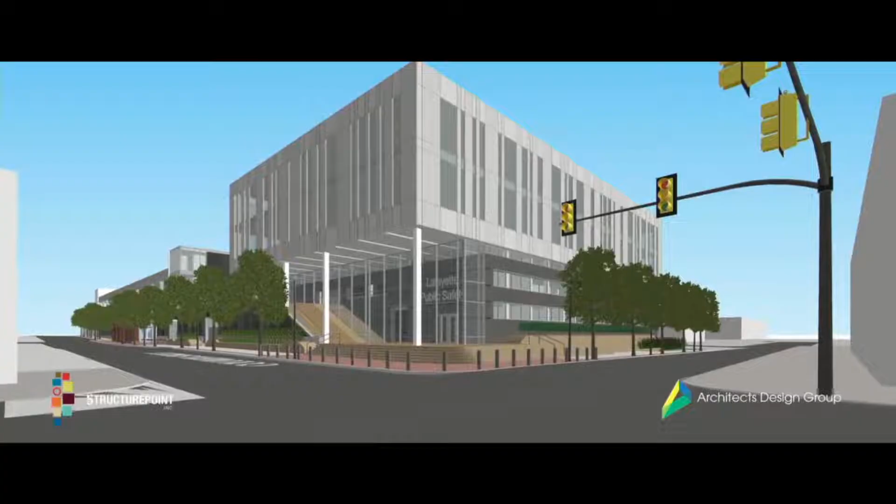The Lafayette Public Safety Building, it's more than just a police station. What we're really hoping for is that we can create a nice centerpiece for the downtown area. And we also want a facility that's welcoming, a facility that says to the community, come on in. Well, it'll be a multi-story building up to 70,000 square feet. The building is being designed with a lot of glass that let a lot of natural light in. We want this building to also be one where people walk by and go, oh wow.

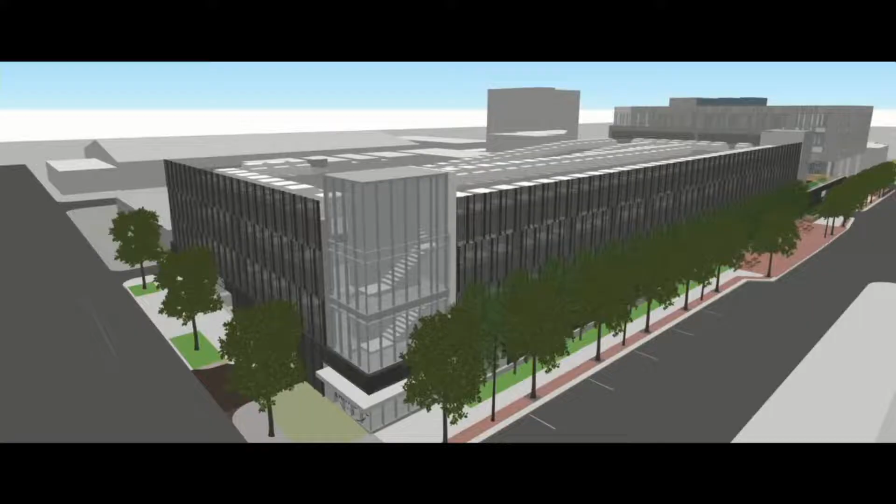The new public safety facility is going to be built where our existing parking lot stands today, on the corner of Columbia and 6th Street. We're also building a new downtown parking facility. Part of that will obviously be used by the police department. It'll be about a 500 space facility.

We can help the police department with their parking needs. We can help our downtown merchants. We can help all of our citizens that come down to participate in all of our downtown activities. We're hoping to break ground at the end of March 2021, and the construction will be all of 2021 and for the most part all of 2022.

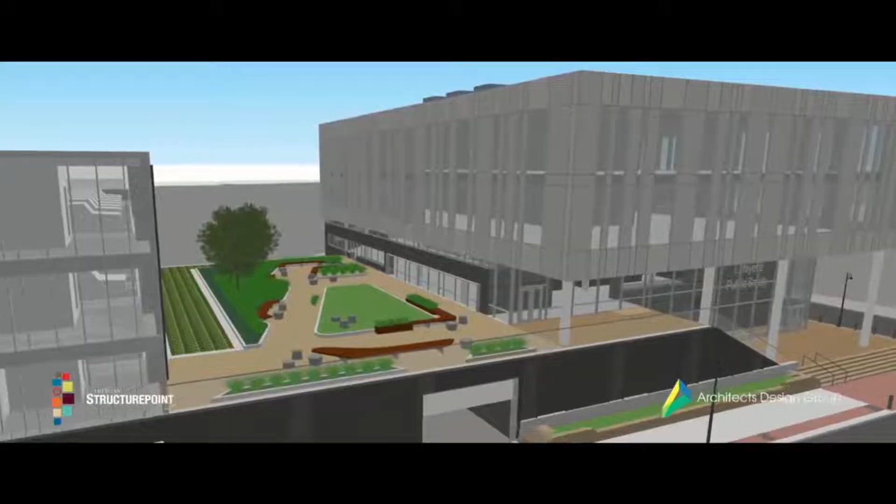We're looking in that somewhere probably in that $45 million range between the entire project. Currently, we're looking for as much feedback as we can get to ensure that we don't miss anything in this process. The public will get to look at some of the first drafts, and we also want their input.

We're excited about that synergy that it's going to create and our ability to provide the very best services to our community in the short term and moving well into the future. Having a department that can recruit the highest and best officers, those officers come to a great work environment every day and have the tools and resources that they need to effectively do their job and to safely do their jobs. We all win. We win from seniors to kids, from businesses to individuals. We all win when we have a safe community and we have the resources needed to keep it that way.

So the next slide we're going to show is a little bit of an animation that talks about some of the growth that we've experienced, not just in Lafayette, but in Tippecanoe County. And while expansion is a great thing, it provides the opportunity to keep Lafayette moving forward. As a police chief and as a police officer, we see this expansion in a couple of different ways. And the one that we're really concerned about tonight is the demand that places on the services for public safety and our resources.

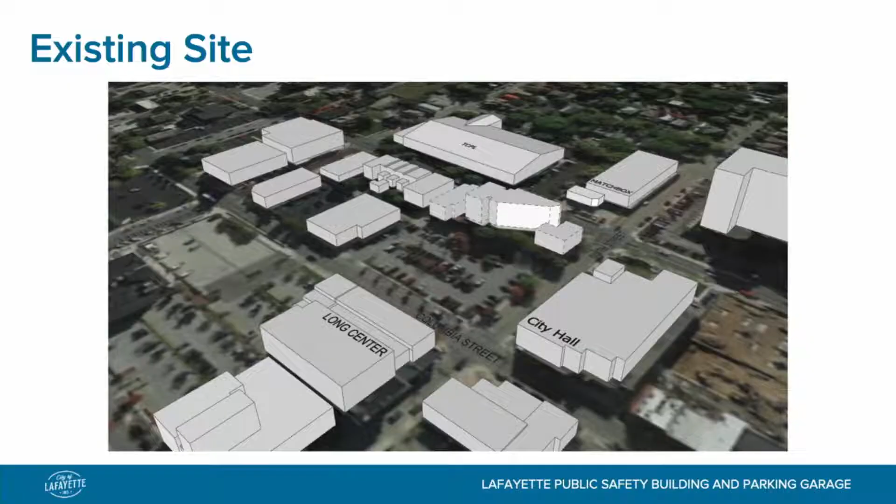Our design process focuses on numerous things from a site selection standpoint and site analytics. Top left of your screen, you'll see the properties analysis. At the corner of 6th and Columbia is the majority of the public safety component of the facility, and stretching through to 7th Street is the parking garage component. There were many iterations and design studies on how to use such a compact urban site—do we go down, do we go more vertical, do we focus the parking garage closer to the corner, or is it better stretched out along Columbia?

On the upper right, you'll see a connection to the green space. Of course, this is a very urban site, and we want to bring as much green space and softness to this project as possible. We'll be speaking about a component of the project that enhances that green space within the juxtaposition of the buildings, creating another civic space, not unlike what's on the south side of City Hall and closer down to Matchbox to the south of the site.

Lower left of the graphic, you'll see a traffic study. Columbia is a one-way street heading westbound, while 6th and 7th are north-south streets with two-way traffic. So, as the chief was talking about earlier regarding how to react to events and calls, we want to make sure this building has vehicular access, giving officers the best chance to get on the streets as fast as possible when coming from the central headquarters. Most officers are out on the streets, so dispatch is going to be a key component to this facility as well.

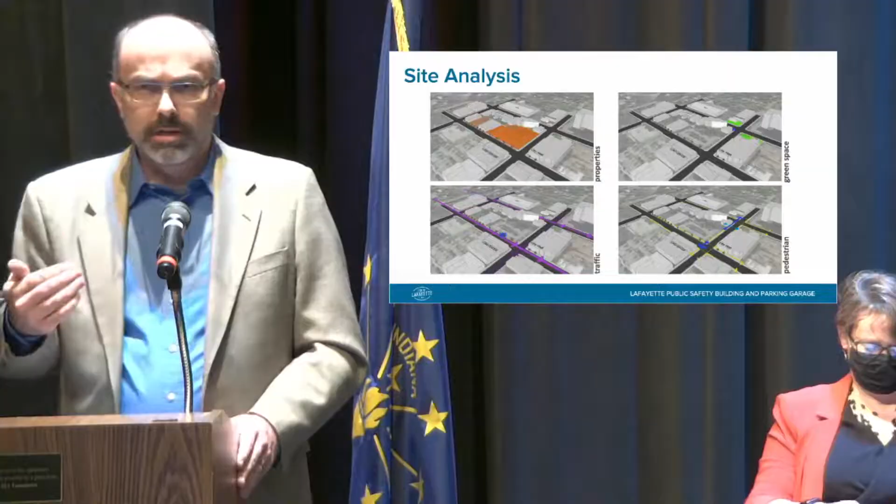Along Columbia Street, heading westbound, we want to make sure—and you'll see in the visuals—what the character of that building looks like. How does it reinforce the fabric of downtown? Does it draw materiality from other aspects of downtown—bricks, metal panels, glass? As the mayor mentioned, there's a strong desire to have natural light into these spaces, so we've brought that into key components of the entryway and the office space within the facility.

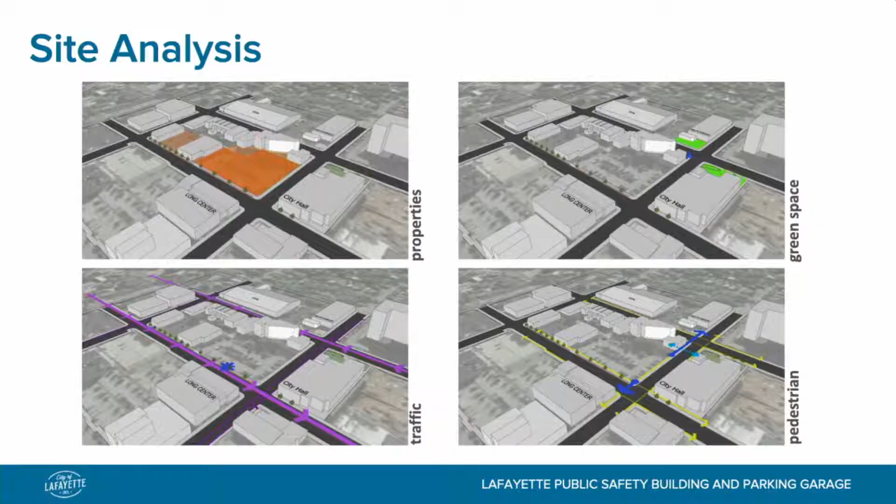On the lower right, which may be the most critical aspect of a downtown facility, is the pedestrian traffic. We want to create a space that is inviting and connects the different aspects of downtown—the hotel, the Matchbox, the Long Center. After events, this facility can act as a public gathering space. In the summer months, you'll be able to relax on a plaza and maybe even watch a movie on the side of the building, which could be a great community asset. This is a community building, not just a police station. It's public safety designed to entice interaction, as the mayor was alluding to as well.

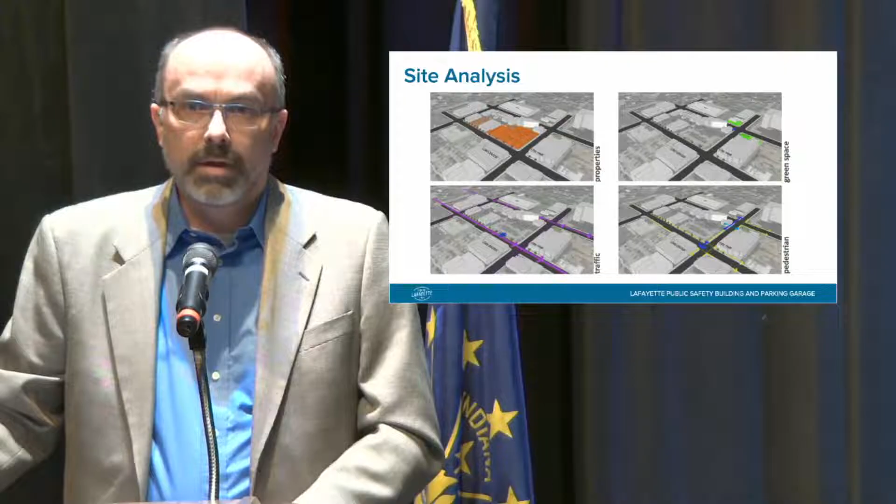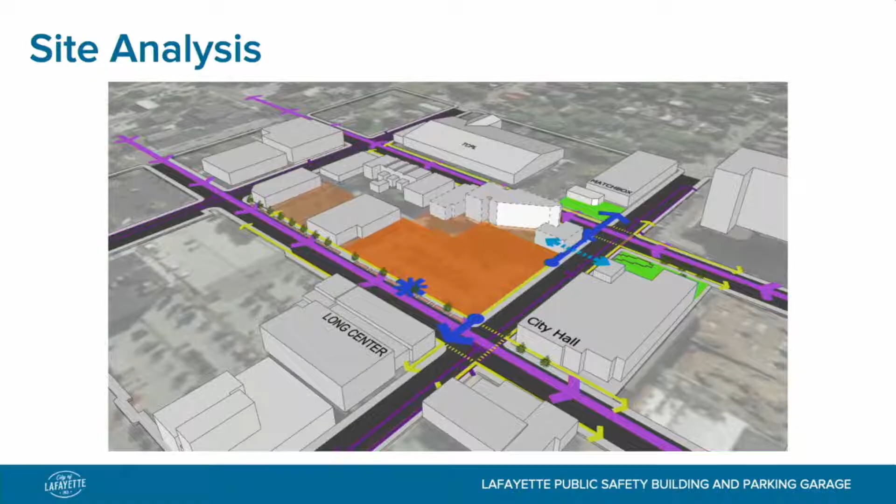So when you bring all these things together, you've layered on the green space, you've layered on traffic, you've layered on pedestrian, you've tried to figure out how to use the property available. Again, it's a very dense site, so we try to arrange things in a manner that's budget conscious, but also fits the program needs of that facility. The chief alluded to, we want to make this an efficient building so they can do their job most effectively to serve you.

Up onto the second floor, you can access that second floor entrance via an exterior stairwell that we'll look at in a little bit, or interior to the building, there will be a grand stairwell or an elevator for certainly accessible means to the second floor. So on that second floor is going to be a great community room aspect to the project. That is going to be able to host events the police require. It's going to be accessible to any community. The city will be managing the access to that room, but it's going to be a great opportunity to bring other types of events to this building, but not detract from the security that the rest of the facility demands.

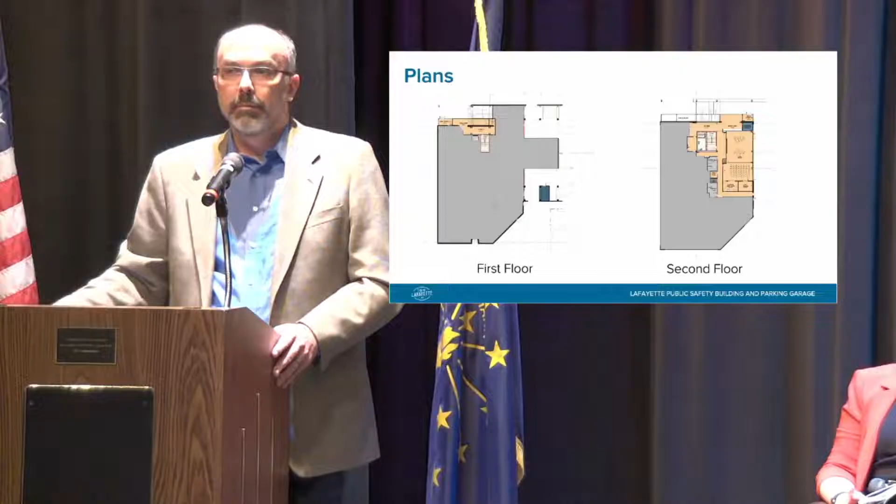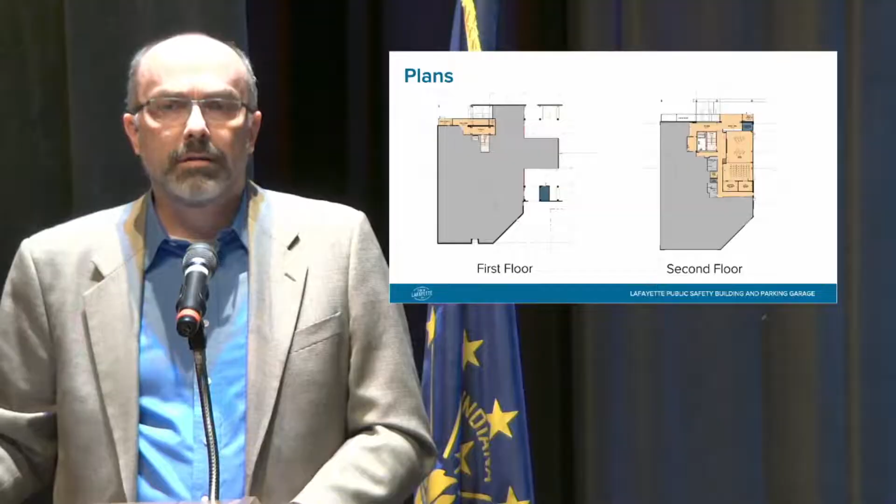So it is separate, but also to the right of that plan, which we'll talk about in a little bit, a civic space on top of a secure garage. So the police have the first floor of the garage, which will be secure for them, and then the public aspects of the garage will continue on the second floor, accessed from 7th Street on the east through metered gates. Daytime parking and nighttime and weekends will vary based on the way the city would like to manage that. There will be a small catering component to that meeting room, divisible partition to kind of separate it if smaller events and groups are required.

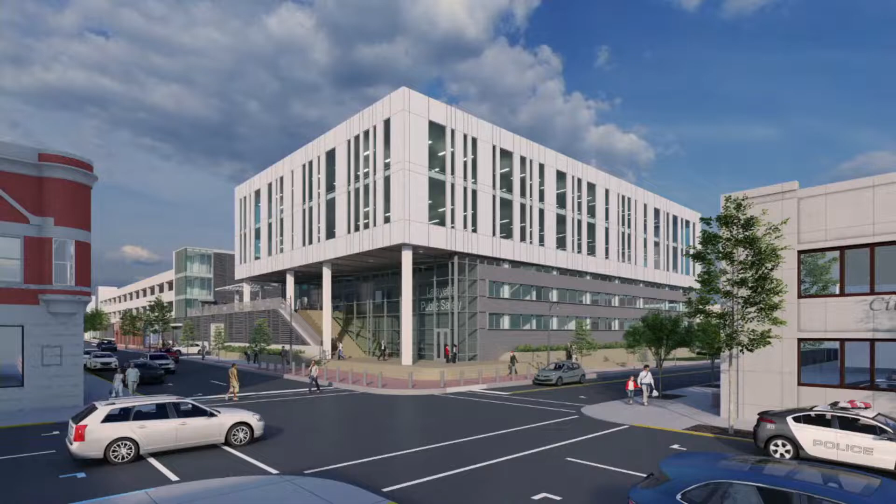So this is a 4-story building. We only showed the first and second floors, the more community aspect of the building. The upper floors have further police department program on those floors.

But again, as we talked a little earlier, we want to make sure this building is contextually connected. Across on the right side of the screen, you can see current City Hall. On the left, you can see the building on the corner, historic building on the corner of 6th and Columbia, just south of the Long Center that we're at right now. So we want to bring in masonry as a historic element on that base, a strong base to lift up conceptually the police and all the services within that building.

So on the upper floors, the 3rd and 4th will be clad in some sort of metal panel, kind of light metal panel, silverish, that might have some different tones to it to add some character along the facade, with varying widths and dimensions of glazing to let as much natural light as we can into the facility, but also maintaining as much energy efficiency as we can. We certainly want to make sure with the energy code demands on the building, but just being good stewards of city tax dollars to maintain this facility. We want to make sure that that's responsive.

Next slide, please. This is a view heading westbound on Columbia, nearing the end of the parking garage, so you'll see the entrance to the parking garage. This will be accessible from the public, with accessible elevators to all levels of the parking garage, but also takes you to an accessible entrance to that civic plaza on top of the parking garage.

Secure entrance to the police parking on this side, and then we're trying to create an element along Columbia that breaks it up, adds some texture and visual color to that base. Again, creating a strong base, and then bringing the element of the police station out to Columbia so it has a strong presence, and the building itself is its own landmark on this corner of the city.

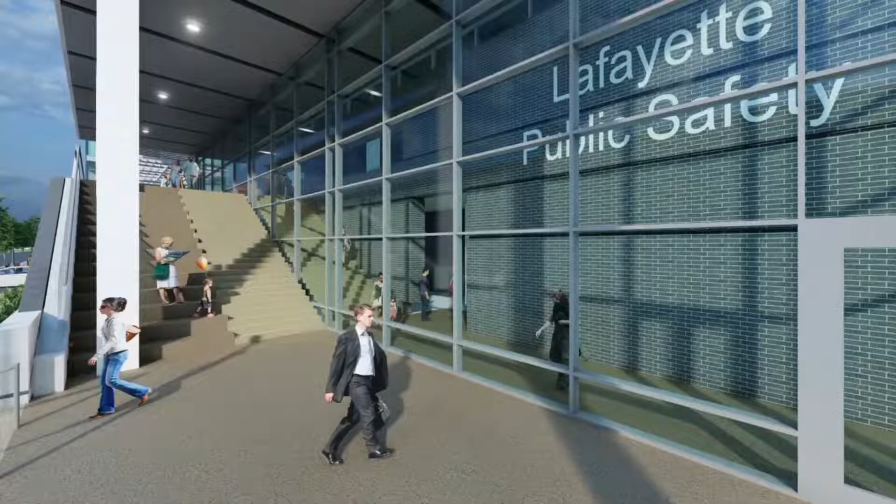Next slide, please. So this is standing on that main entry plaza, heading into the building. Inside, we're going to have a mix of openness of the stair, views into the point where the police officer will be standing or stationed for greeting into the facility.

Stairs to the second floor, where public records will be. That's where you'll be able to obtain any records you need from the city. And this part of the facility, we think, has a covering to it, which creates a sense of protection over the citizens and patrons of this facility. It's going to be just a great open civic space.

Next slide, please. So right now, I'd like to turn it over to Dennis Carson with the city to explain a little bit about the whys behind some of these strong components of the project.

Thank you, Dan. We really appreciate your work and the team's work on this project. There's just a few things I'd like to add more information to, and reinforce some of the things we've heard tonight about different aspects of this project. The first is what Dan ended with, the public parking garage component. As we heard tonight, it's going to be about a 450 to 500 space garage, and there are many reasons for this new public parking garage.

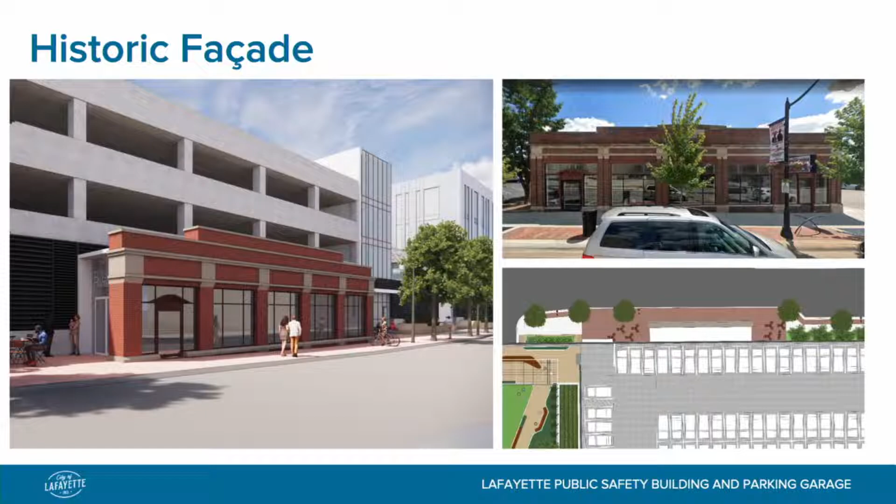We're really excited about being able to offer that kind of space downtown, for these entrepreneurs and these people to try new things in this space. It'll add some activity along this area and activate the street. So we're very excited about that. Let's go to the next slide, please.

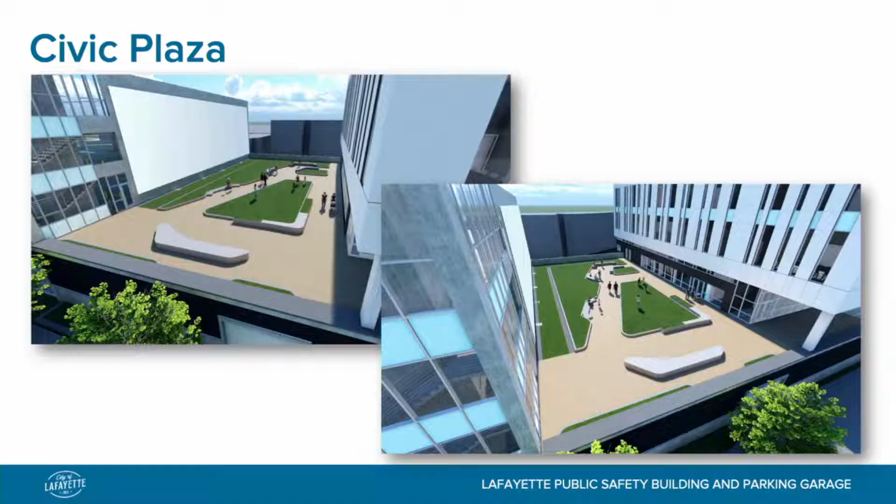Really excited about having that. The other image, looking east on the far side of the screen, is looking at the parking garage. We're putting a screen over that, one to hide the parking garage, but also that screen can be used to project images, do movies or different things. So we're really excited about having this great downtown civic space that can be used by the public but also by police personnel and other people within the city.

These are particular things we want to get your reaction to tonight, and so that's when we go into the Q&A part of the presentation here tonight.